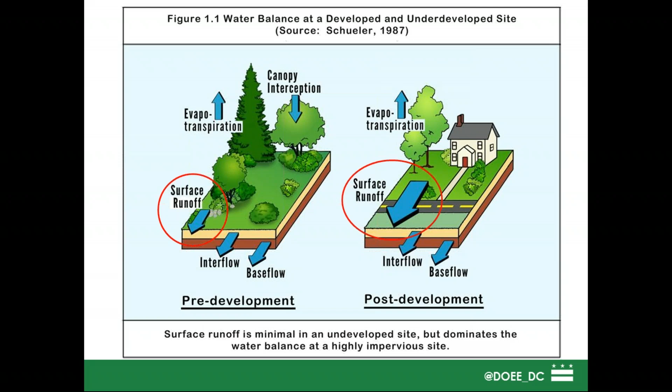And what that results in is a whole lot more stormwater running off of the land. So what we talk about here is stormwater runoff, so the amount of water running across the land. So you can see in the schematic on your left the difference in the size of the arrows between the surface runoff coming off the land in pre-development conditions, and then again on the right, the amount of runoff coming off the land in post-development conditions.

Okay, so what? So why do we care? Well, here's the problem with stormwater runoff. When we have more volumes, I'm sure many people are very familiar with flooding issues that we experience. In DC, not that long ago, we had a really big 3-inch storm in July that flooded out Canal Road and made national headlines. In addition, when stormwater runs across the land, it picks up whatever pollutants or other things that are on the land, things like fertilizer, dog waste, trash, heavy metals, grease, and other pollutants.

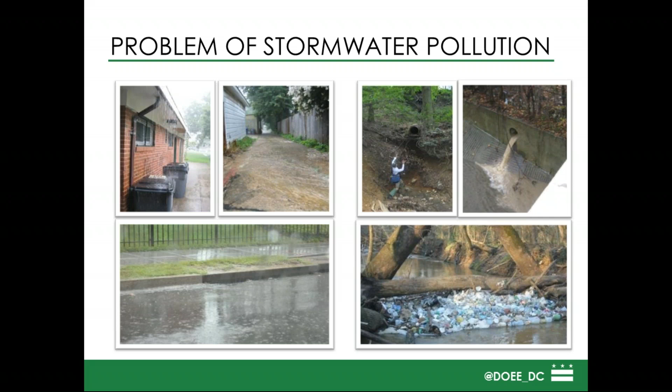And why is that an issue? I think Cecilia touched on it a bit, but wherever there's impervious surfaces, the water can't infiltrate into the ground, recharge the groundwater. It runs directly off the roads, roofs, and other impervious surfaces into these stormwater outfalls and then directly into our waterways, causing erosion, transporting oil, grease, trash, and other pollutants to the streams.

And so this amount of land use and this amount of impervious cover means that a single 1.2-inch storm event, which is the standard that we use in the district, we're trying to capture the first 1.2 inches. That's considered the first flush in stormwater management, meaning that the majority of those pollutants are going to be held in that 1.2-inch event. It will produce about 525 million gallons of stormwater runoff that we're trying to capture and mitigate the impacts from.

So how do we do this? How does DC restore our streams and rivers, our watersheds, and stormwater? Well, we're going to talk about two different approaches today. We're going to hear from DC Water, and then we're going to talk a little bit about what we do at DOEE. But before we do that, I just wanted to briefly go over the fact that the district has a little bit of a different situation with our drainage areas.

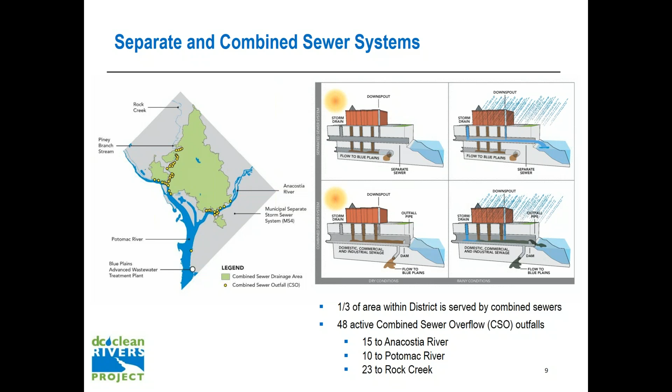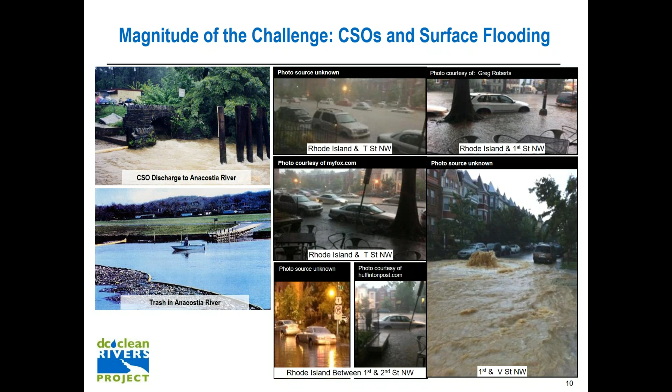Also, we have a storm sewer system that was built by the federal government a number of years back. They were undersized, and so we have significant flooding problems up in the northeast side of town. So the program that Seth and I are going to talk about today, the Clean Rivers Project, addresses these two main issues. One is the combined sewer problem, and the other one is the flooding problem. So the purpose of our program is to address the combined sewers to the Potomac River, Anacostia, Rock Creek, as well as relieve the flooding in the northeast part of the district.

Because the sewage violated the Clean Water Act, there was a federal consent decree that was issued and agreed to by U.S. EPA, Department of Justice, the District of Columbia, and DC Water. We have a plan, I'll show you in a second, it's under a federal consent decree, and it's going to be completed by March of 2030. We're currently on schedule, on budget, and met all the milestones to date.

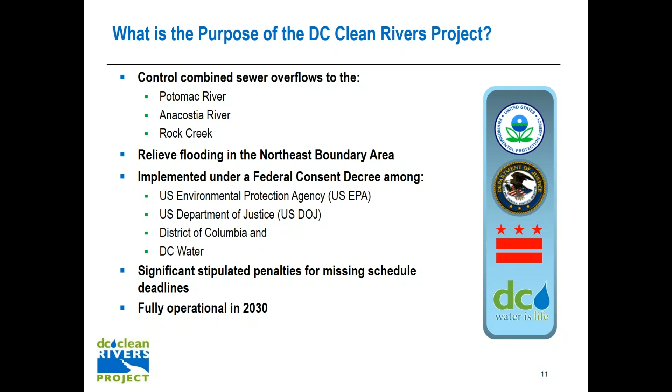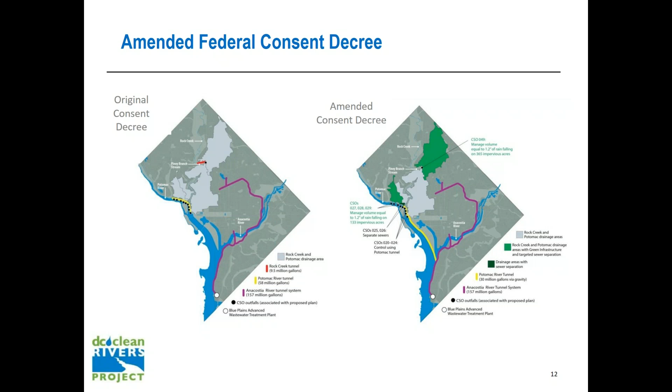On the next slide, you can see what was originally proposed back in the late 90s, and how because of more knowledge and an evolution of knowledge and goals by the community, we've modified the consent decree, and that was modified in 2016 to include the diagram on the right. And we can go to the next slide. It really gets into showing that.

So basically, if you can remember those yellow dots on that first slide that showed the locations of the combined sewer overflows, we have to go there to pick those up. Instead of allowing raw sewage to dump into the river, we're building a tunnel system that's larger than a metro tunnel. If you've been on the metro here in DC, most of those are 18, 19 foot in diameter. We're constructing larger tunnels, 23 foot in diameter, and we go underneath the metro tunnels. We're building a series of tunnels, approximately 18 miles long, to capture sewage that otherwise would end up in the Anacostia or Potomac River.

That drops 100 to 160 feet down to this new tunnel system we're constructing, flows by gravity to the world's largest advanced wastewater treatment system, a cool place to come tour if you ever get a chance to come to DC. Blue Plains is a great place to tour, lots of cool things going on here. We pump that flow up and treat the water, and it looks like Colorado mountain spring water once we finish recycling the water. It's really a good looking product.

Also, you can see those green blobs up in Rock Creek, as well as over in the Potomac River on the schematic. Those are areas of green infrastructure. Seth is going to talk to you a little bit about the green infrastructure we're building in those areas to reduce the combined sewer overflows. It was determined back in 2003 that if we build this system and do post-construction monitoring, we will ultimately meet water quality standards and take this giant source of pollution off the table that's been going on since the 1800s.

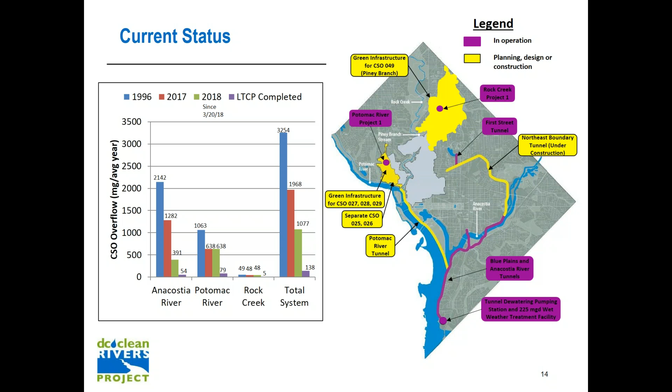So we go to the next slide. We had a very, very wet year. We had 66 inches of rain, the wettest year on record. We captured, with that first 7 miles of tunnel, not 6 million, but 6 billion gallons of sewage, and really exceeded our capture rate. We were estimating this first phase at 80%. We're actually capturing 90% of the sewage.

We've also caught 2,500 tons of trash. A good bit of it's organic material, but a large percentage, as Cecilia was talking about, is those bags that you normally see in our rivers and streams. A number of those came from our CSOs; people drop them into the combined sewers or on the streets, they flowed into the sewers and ended up in the rivers. We've captured that, and now we're getting that out of the rivers.

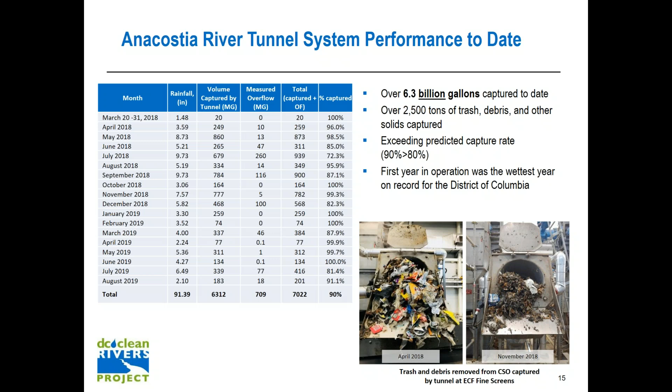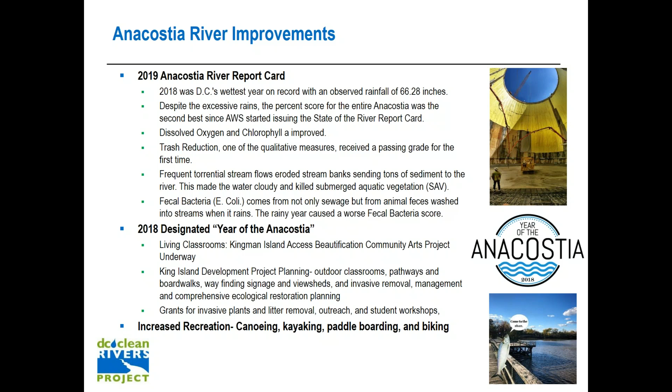The next phase we're currently constructing is the second phase in the Anacostia, which is the Northeast Boundary Tunnel. That's a 23-foot diameter tunnel, about 5.5 miles long.

Pretty good amount of money. It's $580 million, of which the majority is being paid by district ratepayers. And so we're blessed with some wonderful district residents who understand the benefits we're providing. So we're very, very thankful for our ratepayers.

That will be completed in summer of 2023, and then that will meet or exceed the 98% capture of the combined sewage on the Anacostia River. So ultimately, with the CSO program, we'll meet the fishable and swimmable goals. There's still some work that's got to be done by Cecilia's group and fine folks in Maryland, but this large source of pollution that's been going on since the 1800s will be finally addressed.

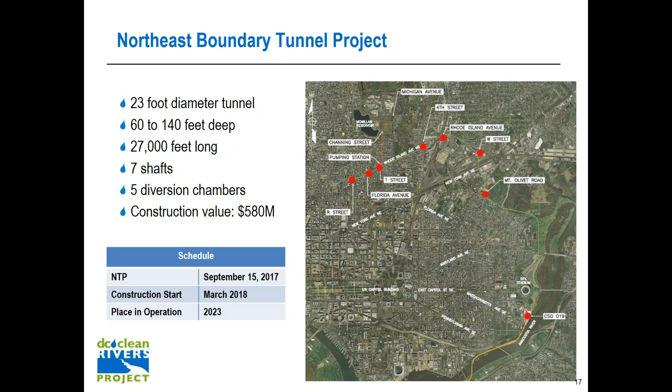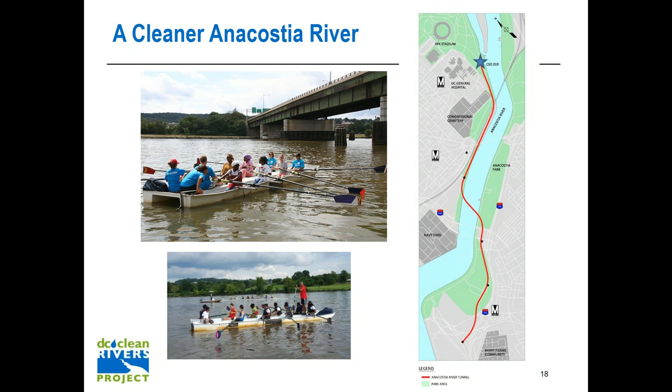So I'd like to turn it over to Seth, who's now going to talk about what is green infrastructure and how it is being addressed by the DC Clean Rivers program and DC Water. Seth. All right, thank you, Carlton. Again, this is Seth Chard, the Green Infrastructure Manager with the Clean Rivers Project. And so we'll talk a bit about what we're doing on the program with green infrastructure. But first and foremost, what is green infrastructure?

Many of you may already be familiar with these technologies, but just to give a brief overview, green infrastructure basically uses processes that mimic natural water processes. So going back to Cecilia's slide about the pre-development and post-development conditions in the district, green infrastructure can mimic those pre-development conditions when it's raining. It filters, it cools, and slowly infiltrates water back into the ground and encourages evapotranspiration. So really recreating or mimicking those natural processes.

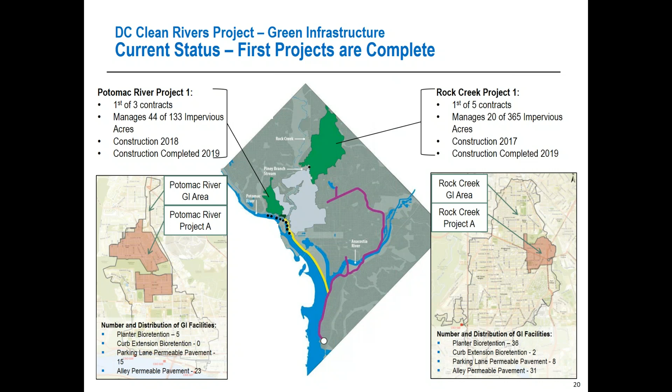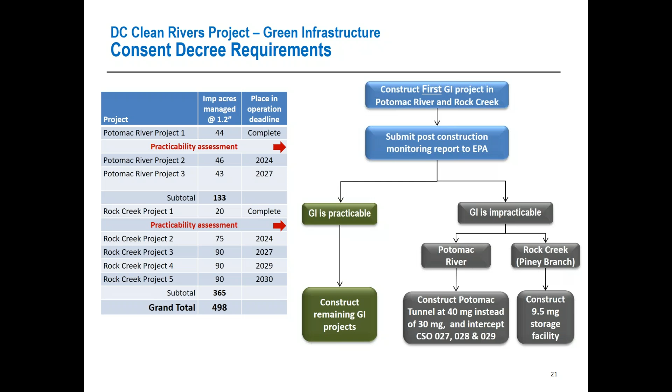Later, in mid-2020, we will complete a report that goes back to the EPA, which makes a recommendation or determination of whether green infrastructure is practicable, in which case we will continue with our program, or if it's shown to not be performing as designed, or if we can't be cost effective, then there's this potential off-ramp to go back to the gray infrastructure solution with a longer tunnel on the Potomac side and a smaller storage facility on the Rock Creek side.

Essentially, all of these facilities, you're excavating out and down about 4 or 5 feet. You're backfilling with gravels to store the water. And then in the case of bioretention, you're placing a very sandy soil on top of that gravel and then planting out the surface. In the case of permeable alleys or permeable parking lanes, instead of that bioretention soil, you're continuing up with the gravels and then putting a permeable pavement surface on top of that alley or parking lane, be it asphalt or concrete or a precast concrete paver.

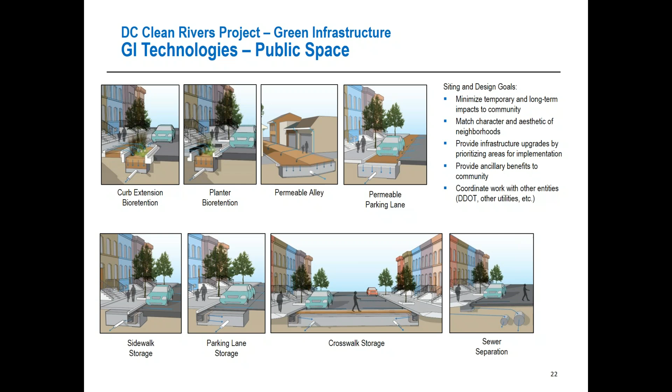Looking at the parking lane, it's very similar in terms of the construction approach as the alley. Really, the only difference on the parking lane is that the surface course is a porous asphalt instead of a precast concrete paver. And that porous asphalt essentially has fewer fines in the mix, and so you end up with more void space in the surface. And essentially, those void spaces allow for rainwater to flow through them, and again, get down into that gravel storage layer.

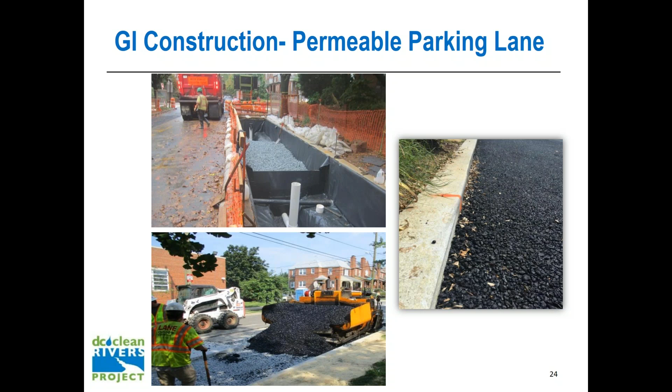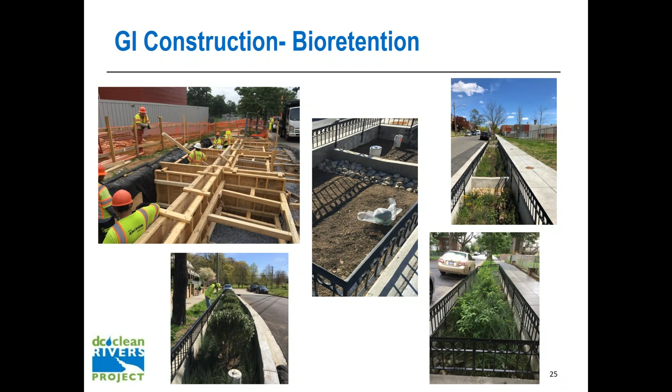Another part of our program is a downspout disconnection. And so within the green infrastructure areas that were identified on those maps, essentially we're going out and going door to door and talking with neighbors and disconnecting downspouts that were previously connected directly to the combined sewer system. By disconnecting that downspout, extending it out and directing that flow across someone's yard or into their landscaped area, you can provide irrigation, but then we're also removing that volume out of the combined sewer system, and again, helping to prevent that overflow downstream.

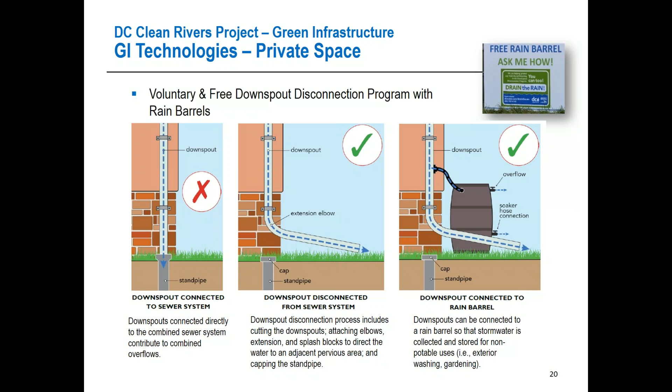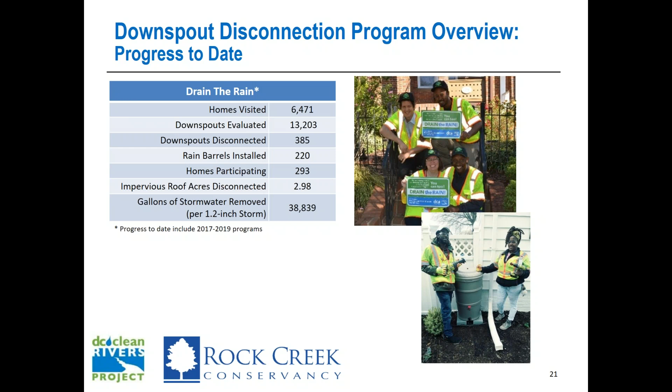And so where does that lead us? Well, again, the green infrastructure area on the Rock Creek side, that subsurface sewer network would otherwise all lead out to CSO 49, into Piney Branch, and then out into the Rock Creek Park. And so by building more green infrastructure, doing these downspout disconnections, we can reduce those combined sewer overflows and keep that mix of raw sewage and stormwater out of Rock Creek Park, enhancing the enjoyment for residents and visitors within the park itself.

And then finally, just looking at a few examples of other projects that DC Water has partnered with DOEE and in some cases with National Park Service. We have a couple examples here. So Soapstone Valley Sewer Rehabilitation. The Soapstone Valley is a really beautiful side branch off of Rock Creek Park. There's a beautiful trail and creek that runs through it.

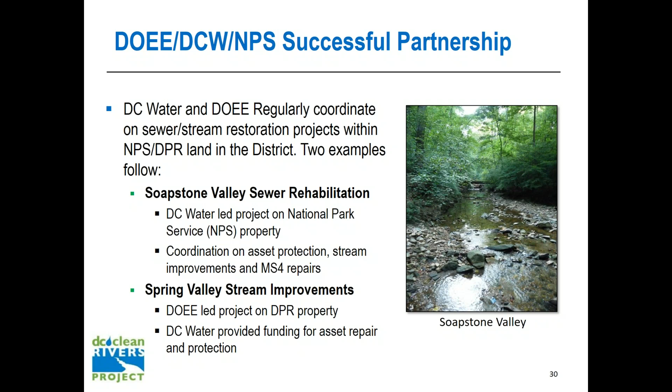Unfortunately, there was also a pretty severely degraded sewer pipe within that valley. And so we partnered with DOEE and NPS to make some improvements, and we'll talk a little bit about what we did there. And then the other one is Spring Valley. And so that was a DOEE-led project where we were able to partner with them and do some improvements to the sewer pipe to repair and protect that pipe.

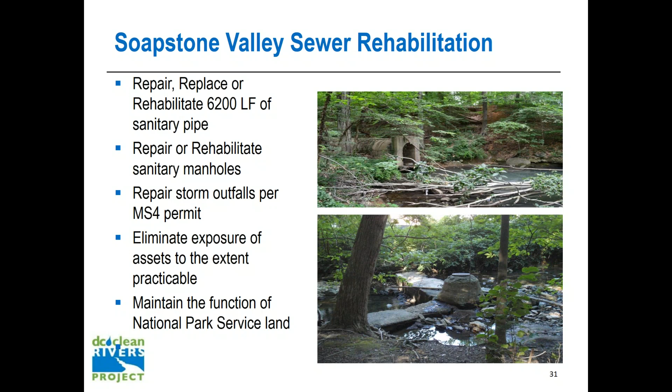So specifically on Soapstone Valley, we will repair or replace and rehabilitate approximately 6,200 linear feet of sanitary sewer. Again, repairing and replacing a number of sanitary manholes, also stormwater outfalls, and protect the sewer infrastructure, which in some cases the stream bank has eroded away, and you can see some of that in the pictures on the right. And of course, all of this is to protect the park and enhance recreation and enjoyment and the ecological function of the park.

Moving on to Spring Valley, this was essentially a DOEE-led stream restoration project, but we identified a sewer pipe that was in need of rehabilitation. And so partnering with DOEE, we were able to work under their permit and do the repairs to the sewer pipe and get that repair done in a much more streamlined fashion than if we had gone on our own to do that. And then finally, I'll turn it back over to Carlton to talk about a National Park Service DC Water partnership.

So one thing is when you have a big program like DC Clean Rivers Project, when we interact with National Park Service, like Nick was talking about, there's multiple groups and people that we interact with at the National Park Service. So it was helpful for us to have one person that we can use as a liaison. And so we actually hired this person through the National Park Service and through a project agreement to help us facilitate communication, because that's the word. We must communicate what's going on, what's going to happen.

And so it helps facilitate reviewing permits, construction issues, and helps basically address the things that if we're having to deal with multiple folks at different times, it'd be a little more difficult for us. And so that's worked out extremely well. We've had that agreement for a number of years, and we're pleased. It continues to happen today. It's just a great service. I thought the folks on the phone might be interested in knowing that something like that does exist.

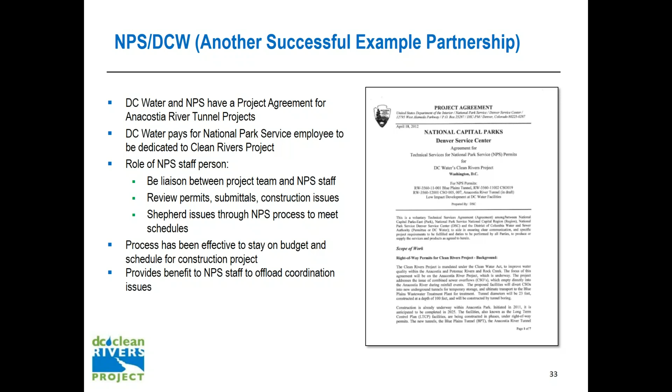So I'll turn it over to Cecilia and Stephen now. Thank you. Thank you, DC Water. That was an excellent overview of the gray infrastructure upgrades that are going on, as well as the green infrastructure upgrades that you all are doing.

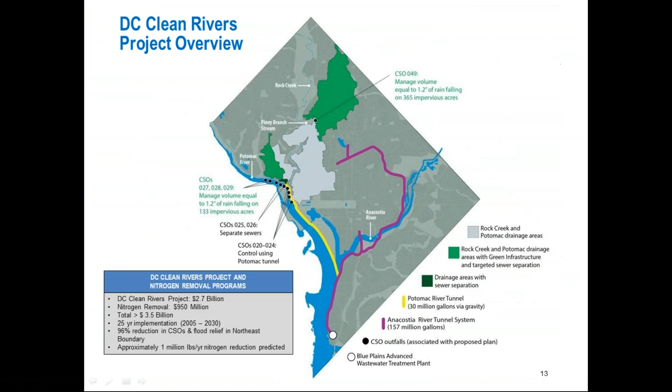Can you see my screen? Yes. Okay. You're seeing a DC Water slide, unfortunately, though. Hang on, everybody. We're going to go fast forward through this real quick. Little recap of what we just learned.

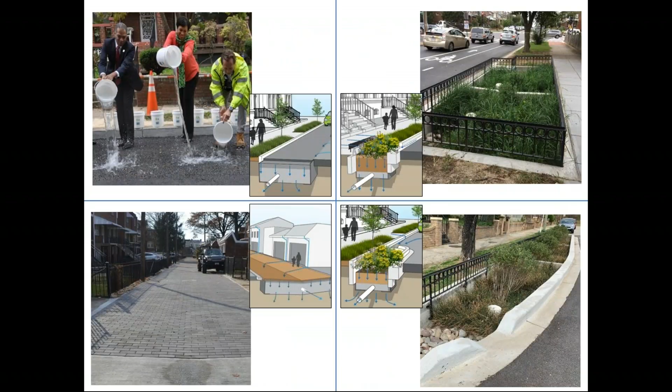Okay, so now we're going to talk a little bit about how the District Department of Energy and Environment, DOEE, handles our restoration approaches. Again, we're going to remind you that there's two different sections of the district when it comes to drainage. We've got the CSS where those tunnels are going in to capture a lot of that, and the MS4 area where there is no treatment of that stormwater. It goes into the drain, it goes into a pipe, and it goes straight into our streams and brings everything that it picked up along the way with it.

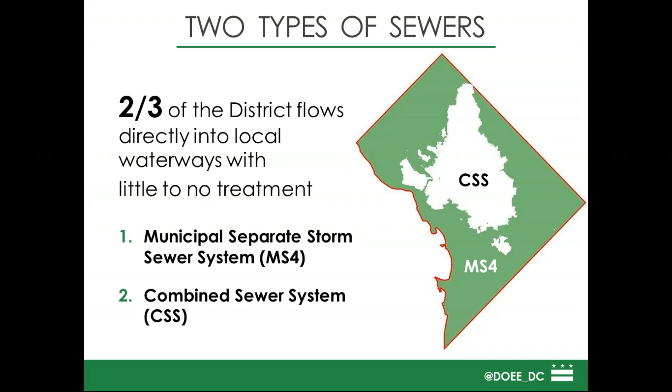Again, we focus our efforts in the MS4 because we assume that DC Water's efforts with the tunnels is pretty much taking care of the stormwater pollution problem in the CSS area. So again, looking at the green portion of the district is where we focus our efforts. We don't own any land in the district, so we have to work with partners. And one of our best partners are our federal partners, National Park Service. So how do we handle restoration? Well, we've got basically three main avenues. We've got a regulatory hook. We have stormwater regulations.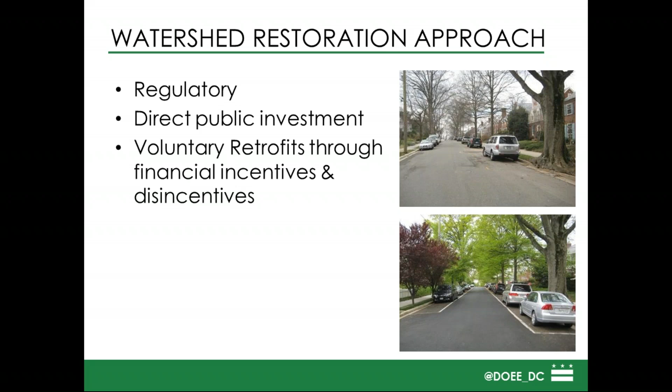So for any new development and any redevelopment that breaches a certain threshold, people must do stormwater management as part of those projects. We have direct public investment, which is, we're going to talk about two different case studies in a little bit about how we actually invest in these restoration projects. And then we have voluntary retrofits, either through financial incentives or disincentives.

Some of our incentive programs include a stormwater retention credit trading program. So this is a cap and trade kind of program on an open market. So if someone overbuilds and does more stormwater management and someone else can't, they can actually buy those credits in an open marketplace. And then we have these incentive programs, such as River Smart Homes.

Do you live in the district? You could be eligible to participate in the River Smart Homes program. Everybody contributes to the problem of stormwater management. Your home, your driveway, your yard, everything contributes. So we'd like to see a lot of that stormwater kept on site, reduced on site through different mechanisms.

We also retrofit schools, some houses of faith, and we have a green roof rebate program. So if you feel like putting a green roof on your parcel, on your property, we will subsidize a portion of that because we'd like to see that stormwater kept on site. Now, I'm going to talk about a case study of a larger retrofit project that we did on National Park Service land in the Rock Creek Park.

We do both upstream restoration efforts, which is what I focus on, and downstream restoration efforts is what Stephen focuses on, and he'll talk about that in just a moment. So the one I want to talk about is the Carter Barron Stormwater Retrofit Project. So a little bit of background information. This is actually in the headwater streams, or what we suspect are the headwater streams of the Blagden Run watershed, which is about 240 acres and averages 69% impervious cover.

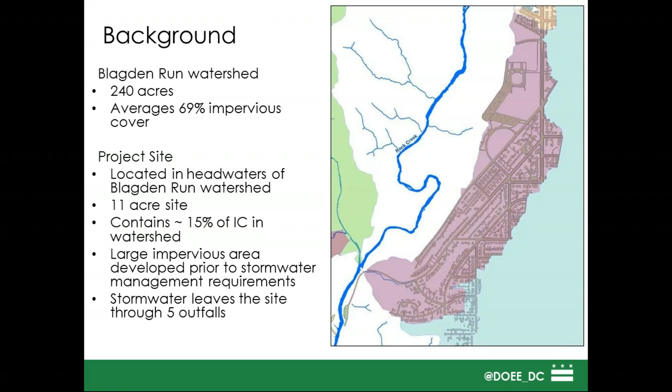The Rock Creek Tennis Center, where we focused, or Carter Barron, is an 11-acre site, which contains about 15% of the impervious cover within that watershed. So large impervious area that was developed prior to any stormwater management regulations. So there are lots of opportunities on the site. We'll talk about how the stormwater leaves the site in just a minute. That graphic demonstrates the whole watershed.

So existing conditions, or conditions prior to this project, we had a lot of impervious cover that was relatively unused. There were probably a handful of events that happen there every year that fill up that parking lot. So the parking lot is necessary, but it's not used all of the time to capacity. So lots of opportunities to capture and slow down that stormwater.

You can see we're kind of at the top of the watershed, so water kind of leaves the site, goes through some outfalls, where at the time we thought we just discharged it to wooded areas, but what ended up happening was a lot of gullies were formed as a result.

And this is truly a great example of partnership, because this project was brought to our attention by U.S. Fish and Wildlife Service, who had been doing some sampling and determined that this area potentially had some important species for us to protect. And they came to Rock Creek Park Service and they said, hey, we would really like to see you do something about these gullies that are eroding, because the sediment could impact the downstream habitat. So Park Service came to DOEE and said, can you help us with these gullies?

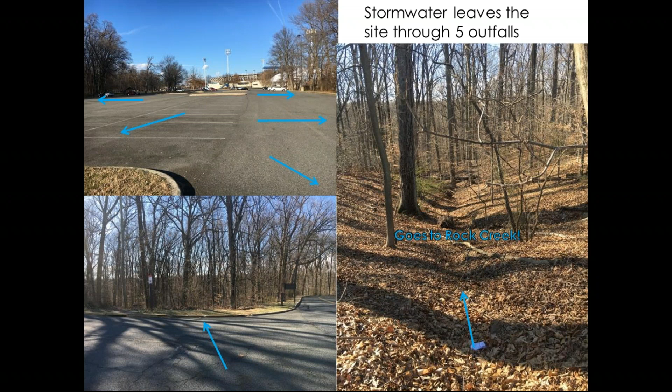And we said, wow, look at all this imperviousness and all of this adjacent open space. We can do a lot more than just stabilize these gullies. We can do a lot to clean up the downstream conditions. So stormwater used to leave the site through 5 outfalls. And now I'm going to just take you, in the interest of time, very quickly through some before and after pictures of the project.

So here on your left, we've got before pictures. You can see we've got a nice big open space through the trees. And what we try to do in stormwater management is capture that stormwater coming off of impervious and bring it into a space that's relatively unused and can handle some of those practices that Seth was referencing, like the bioretention or the permeable pavement.

So you can see on the left, we had a really big open space, but we had to get through some trees, and this is right adjacent to a parking lot, that parking lot I showed you earlier. And you can see afterwards how we created some of these bioretention cells. But we had the challenge of how do we get that stormwater from the parking lot to the area that's open, because we do have to get through trees.

And one of the things we heard from Park Service as part of this project is we don't want to lose any trees, we don't want to have any negative impacts to trees. So you can see we had to do some creative design to get that water to come in through an inlet channel and wind its way through the trees.

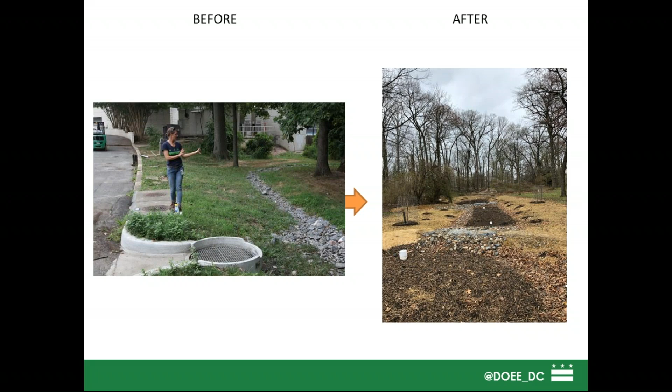And this is just another photo of the practice from a different angle, a little bit more recently, so you can see some of the vegetation that's starting to grow up. And this is a water quality practice that's going to treat water. So again, here's that parking lot before, so lots of unused impervious cover, and then after, or during construction of the bioretention. So now water is actually going to go into the bioretention and slow down and filter.

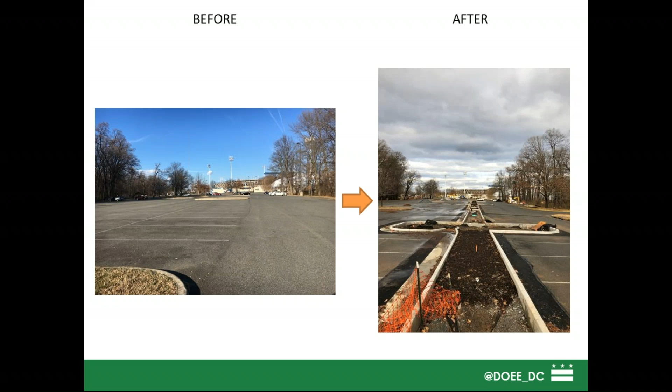And you can see we didn't really lose that many parking spaces. We did have to shorten some of these to compact cars, but didn't lose too many parking spaces. So again, before and after, and before and after. And the point of these photos is to really show you that what we're looking for when it comes to stormwater management are opportunities where A, the water is already going, B, we're trying not to impact the existing use of the site.

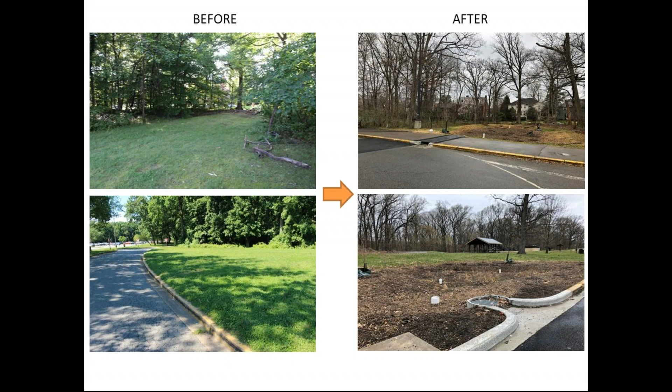So in the lower left, you can see this is an area of turf. It was previously an area of turf that was just managed turf. It wasn't necessarily used for anything. It doesn't have a dedicated function. And so now we can make it a stormwater feature without having any negative impacts, which is also going to not only improve water quality, but also improve habitat with the different vegetation other than turf.

So here's another interesting photo from this project. Water originally ran along that curb line into a storm drain and went into the pipes and went straight into the streams, like we discussed earlier. But look at all those trees just on the other side of the curb line. Wouldn't they love to have some of the additional water?

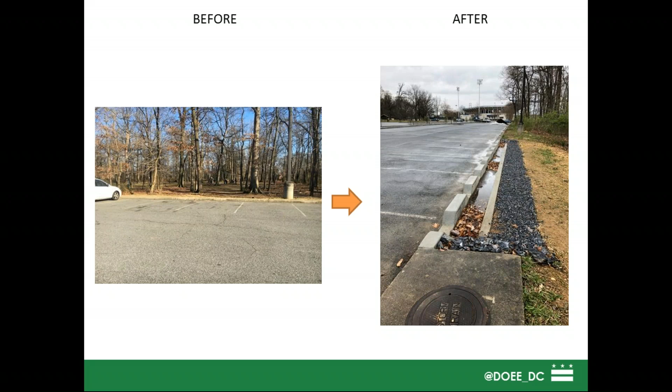So this is a very basic, straightforward approach. We use something called a level spreader. So we allowed that water to be disconnected from that parking lot. We took it from the parking lot and put it into the wooded area before it went into the storm drain. Very, very straightforward, feed the trees or water the trees.

Here's another area where we've got right-of-way along the roadway coming into the site. You can see there's an impervious pathway on the right-hand side, which goes around an athletic field. And it's a heavily used pathway and a heavily used athletic field. But this strip of managed turf is nothing more than managed turf. So how can we make this an actual stormwater feature?

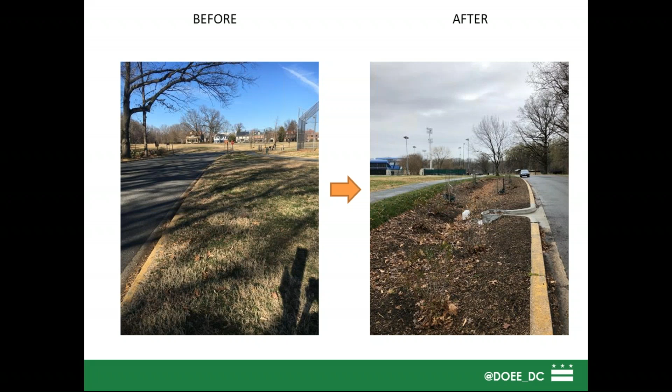Well, we can bring the water in and do that engineered filter media mix that Seth was referencing and build a bioretention. These are, again, not the best photos because they were taken shortly after construction, but you can even see in this one, which is more recent, not only does this have a water quality benefit, it's aesthetically more pleasing. Once we get the signs up, it'll be an education and outreach opportunity to all those people using that walking path. And finally, we're creating habitat for pollinators and other important members of our community.

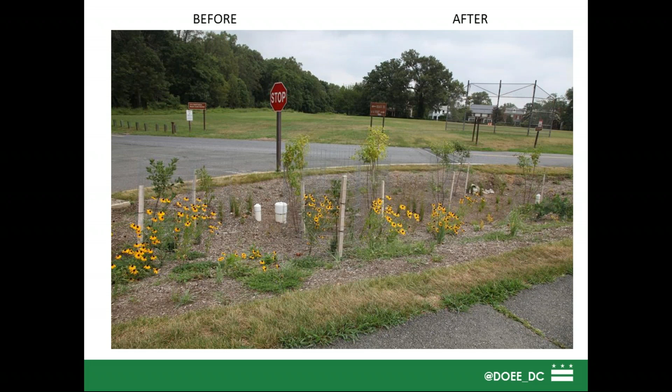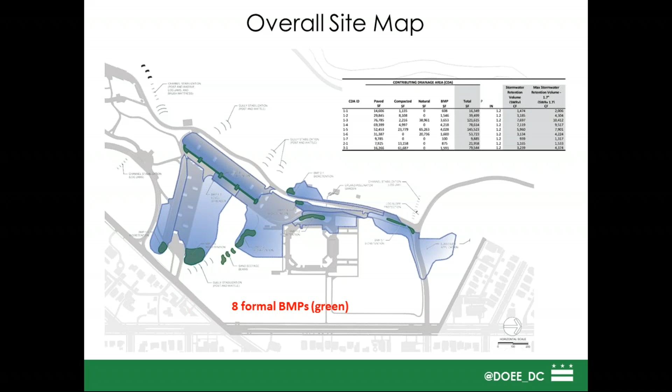So very briefly, going over the highlights of this project, I only showed you a few examples. Basically, we were able to do 8 formal, what we call BMPs, or best management practices. So those are the pictures I was just showing you. We did 7 gully stabilizations as a part of this project, and something called a subsoiler application, which is a deep tilling approach to reduce compaction, improve infiltration, and restore the hydraulic functionality of soils.

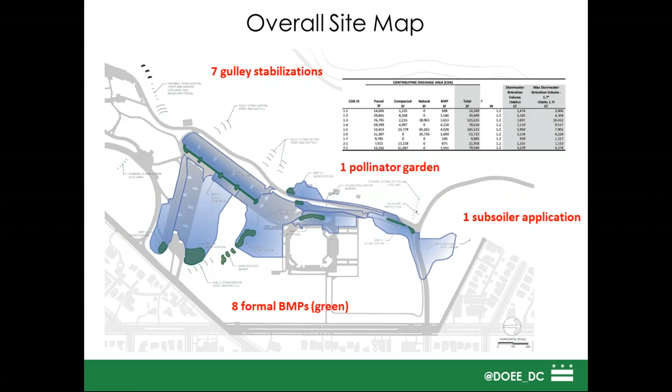Because one of the things we are learning more and more is it's not just the impervious that's generating stormwater runoff volumes, but it's also the managed turf areas, since they are pretty compacted. We just won a NFWF grant on that, so more to come. Stay tuned. Oh, and we've also built a pollinator garden per Park Service's request, since they love the pollinators. So really quickly at project benefits, obviously there's a stormwater function to all of these.

But habitat protection, enhancement, and creation, not just a creation upstream, but the protection for the downstream critters that we talked about. There are air quality and urban heat island benefits to all green infrastructure. We did build a community amenity, and obviously, like we said, educational opportunities.

I would be remiss if I didn't say that this won the Best Urban BMP in the Bay Award, which is a stormwater contest, a little contest for stormwater nerds. It was the best retrofit in 2019. Thank you very much. I'll take that.

But the highlights are, and these are the preliminary results, this project effectively manages 30,000 cubic feet of stormwater runoff, about 16 acres of land. You heard a lot of us talk in acres and how many acres we're actually managing. And then our annual load reductions of about 5 pounds of total nitrogen, almost 120 pounds of total phosphorus, and 6,000 pounds of sediments that are reduced and kept out of our waterways on an annual basis.

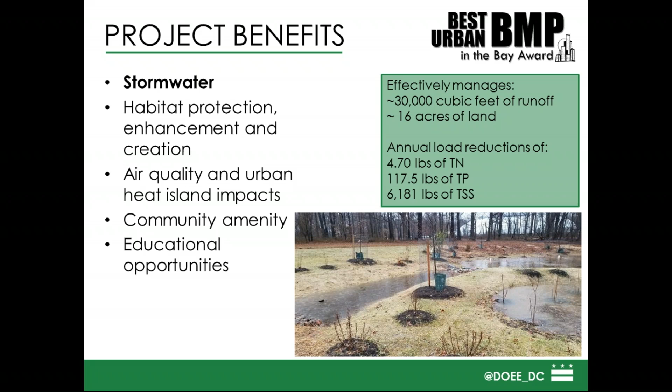And those numbers are really important for us because we have something called an MS4 permit where we have to meet those load reductions, so we can count that towards meeting our permit requirements. And they're also really important towards cleaning up the Chesapeake Bay. And so with that, I'd like to hand it over to Stephen to talk about some of the downstream options. Yeah, hi guys, it's Stephen again.

And in the interest of time, I want to leave probably 5 to 7 minutes for questions. And most of my slides are just ugly and pretty pictures, kind of before and after. So this is our Milkhouse Ford stream restoration. This was, I think, the first collaborative project we had with National Park Service and Rock Creek Park. It's similar to Soapstone. There was some exposed sewer. You see some pictures of that.

This was completed in 2011, and it was also my chance to first meet Nick Bartolomeo and Bill Yeaman. So I've known them since about 2011 and still have a great relationship with them. So here's some quick background. I'll let you read most of it, but it's a 36-acre drainage area. There's 2 tributaries that come in. And if people are familiar with the district, this is by St. John's College High School off Oregon Avenue.

And you can see on the right part of the picture how these two tribs came in, went to Milkhouse Run, the main stem of it, and then that went directly into Rock Creek itself. So I think that's really all I need to say about that. You'll see most of this is photos, and it'll give you a sense of what the project completed.

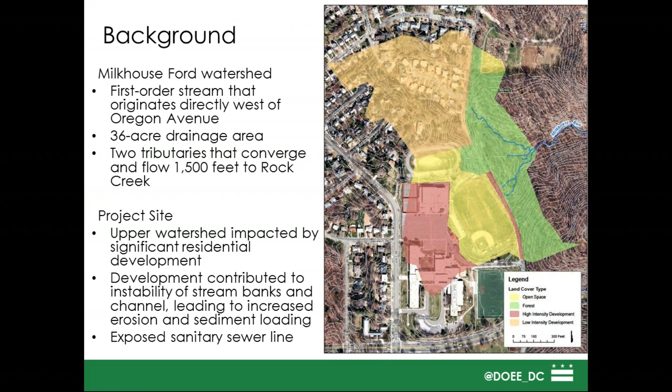So that's a picture of me back in 2011, standing on this exposed sewer line, a DC Water line. Again, we worked closely with DC Water on this project as well. On the right, the gentleman looking at that pipe is a DC Water engineer who was inspecting this pipe before we completed the project. It was leaking a bit, so we repaired that before we performed the restoration. And just keep a look at that manhole.

You can see how exposed it is, and you'll see some other photos in the after that will show how high the original stream bank used to be. The sewer work, we think, was probably done in the 60s. Usually sewer lines have a couple feet of cover over them. So you can see how much the stream or tributary was degraded over the last 40 to 50 years.

To do this, we had it designed and constructed by consultants, and they used a technique called regenerative stormwater conveyance, which basically mimics a natural stream, and you have a pool and riffle system to transport the stormwater through the system. It dissipates energy. It's able to infiltrate. You can see where it says seepage. There's water that replenishes the groundwater table.

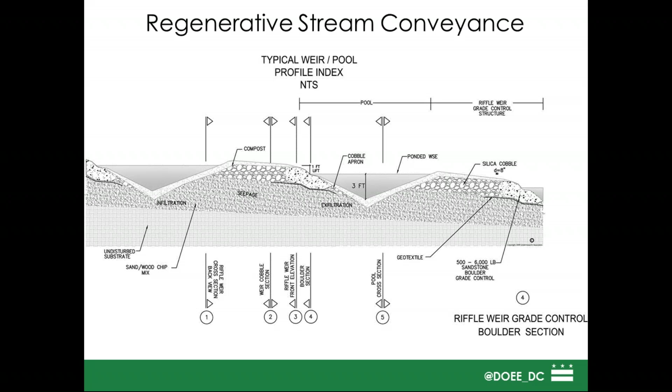And in some cases, we've seen dramatic rises in the groundwater, on the order of 10 feet or so within a week or a month. It really impacts the groundwater in a positive way quickly. So here again is that manhole that I showed you. You can see the sewer line that's just kind of hanging there. I could crawl under that.

And then you can see the after. This is taken from the same perspective. And we brought that stream up. In some cases, this gully was 10 to 15 feet deep. And we were able to raise it to what we think was probably the elevation it was when the sewer line was installed. And again, you can see that system of riffles and pools that work their way down the system, converge, and then go off to Rock Creek, which is probably, I think, half a mile from where the confluence is.

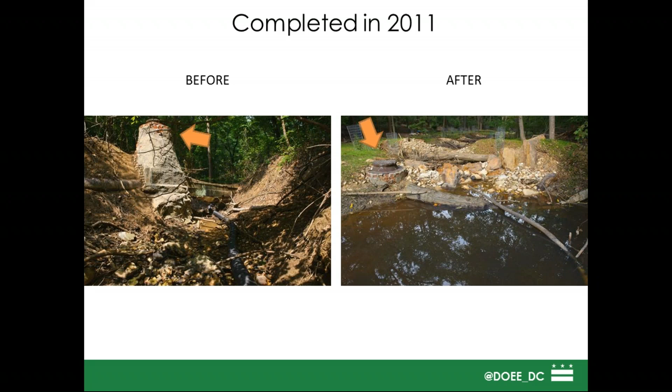A lot of these systems, and if Bill were here, he could attest to it. Right after construction of this, the frogs moved in very quickly. There were neighbors that said they hadn't heard frogs before and were kind of astounded to hear the peepers and different species of frogs that made their way somehow. I don't know how that works, but I'm an engineer.

Upcoming projects: we're doing an outfall restoration project in Rock Creek. This will hopefully be happening in 2020. We're following the NEPA process, but hopefully we'll just be able to use categorical exclusion and not have to do a full EA, saving time and money. So I actually walked all the sites with Bill and Nick, and we were able to identify sites that hopefully we won't have to go through the extensive EA process.